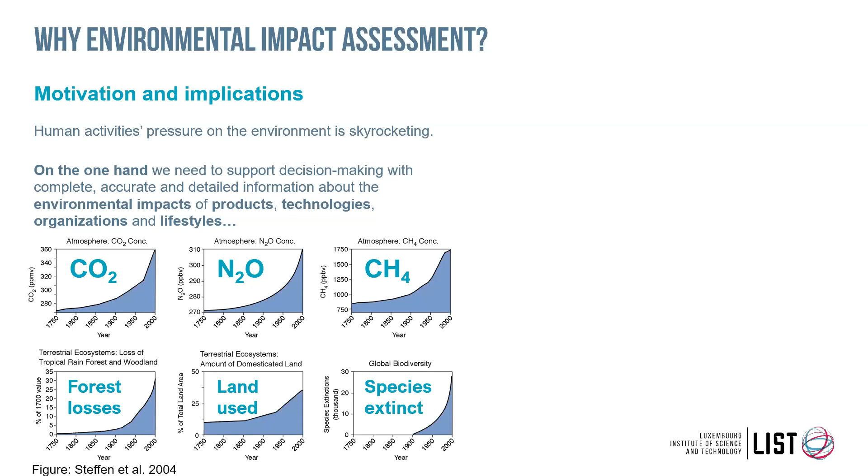So on the one hand, we need to produce and to support decision making with complete, accurate information about the environmental impacts of what we use. What we use can be anything from products, technologies, organizations, even lifestyles. If you know about individual carbon footprint, then the understanding behind it is life cycle thinking, and that's an assessment of your lifestyle. And on the other hand, we also need to ensure a safe, affordable, and fulfilling future, right?

We could obviously reduce environmental impacts if everyone was living in 10 square meters and eating only soybeans or bread and water. But that's not really what we want. So we want to find this balance between, on the one hand, limiting environmental impacts and not crossing the so-called planetary boundaries, and on the other hand, finding a satisfying life for most people. And for that, we have to use energy, a certain amount of energy.

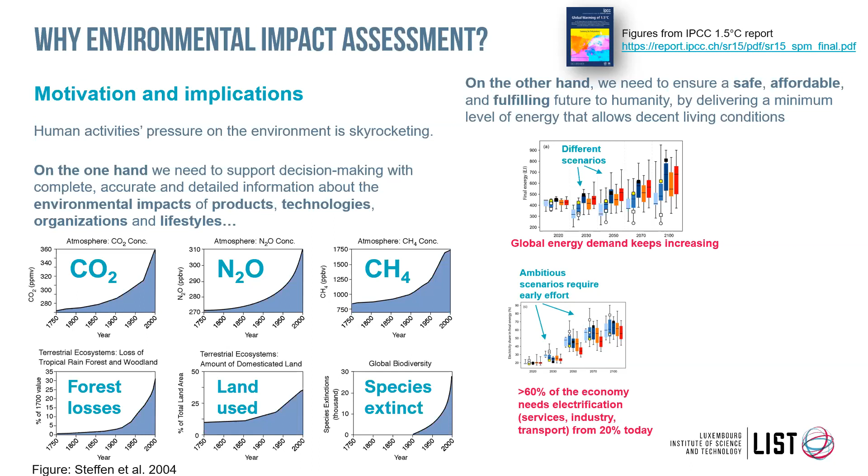We know that to decarbonize our economy, one of the main solutions is to electrify it. And the most ambitious scenarios in the IPCC assume that by 2100, I think, yes, 60% of the economy will be electrified from about 20% today. So that's a huge leap to pretty much an electrify-everything economy. In which case, we also have to decrease the carbon content of electricity.

So on the one hand, we need more electricity. The overall energy demand will keep increasing because more people need to increase their energy demand than people that need to reduce it. And that energy will mostly be electricity, and that electricity will mostly be low carbon. So that's a few challenges we need to address. At the same time, carbon is not everything, right?

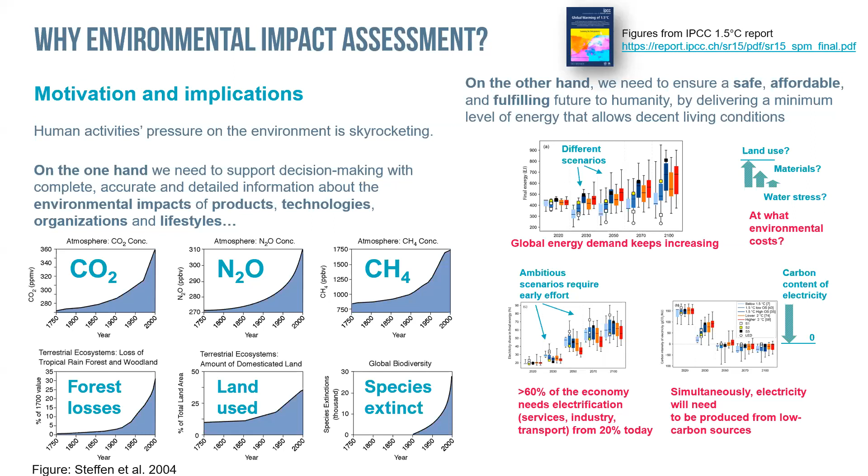We need to make sure that we don't increase other environmental impacts, which I call here environmental costs, but it's not monetary cost. Of course, it could lead to monetary costs, but first, what is the increase in land use? What could be the increase or decrease or other kinds of issues related to materials, and what could be other issues in terms of water stress, toxicity, particulate matter emissions, air quality, etc. So how do we assess our options? You may have seen in the press, usually, that kind of announcement.

So we need this life cycle approach. Let's take the example of electric cars. These cars have almost no emissions during the use phase, maybe a little bit of particles, but that's not so much. But most of the emissions will actually happen upstream of the system, either because you need to make a car or manufacture a battery, or because you need to produce electricity. And all impacts don't happen under your eyes as they do with a diesel car, but you still need to account for that if you do a life cycle assessment.

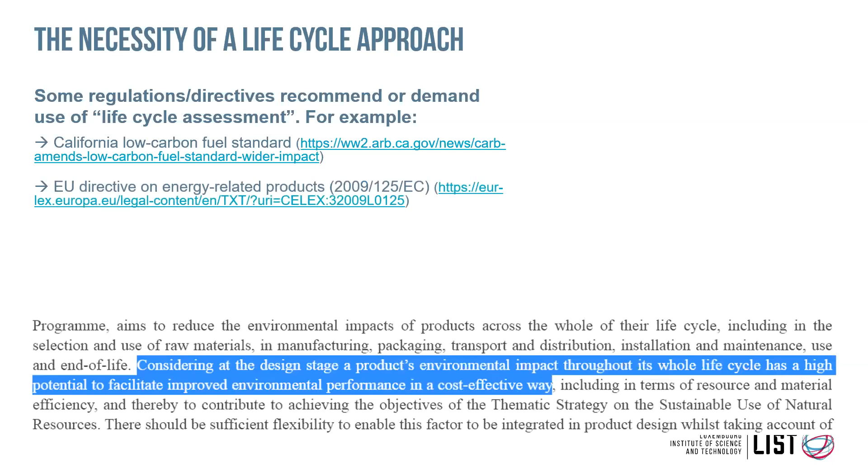Fortunately, at least in Europe, there are regulations and directives that recommend life cycle assessment. Even in the US, the California Low Carbon Fuel Standard recommends that cars' performance be assessed with life cycle assessment. The EU Directive on Energy-Related Products, for example, is using it. The Waste Framework Directive is using it. And perhaps most famously lately, the EU Taxonomy is using a life cycle approach to determine which investments could be deemed green and which not for the energy transition in Europe.

So now let's dive a bit deeper into the definition of what life cycle assessment is. First, it's a method and a tool for attributing environmental impacts to products and services. We have to consider the impacts over the life cycle of the product, not only the use phase. The product has a whole supply chain upstream, and we also need to take into account the impacts of discarding and treating the waste for this product. So we call it holistic, because we take into account everything.

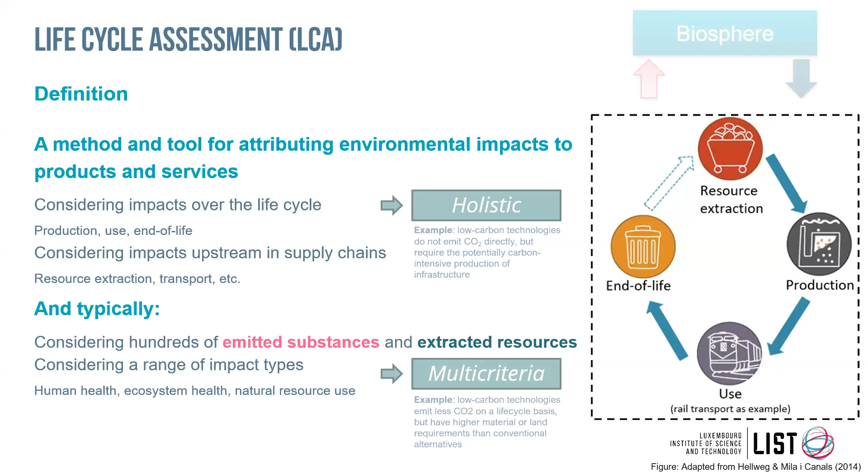And at the same time, we also have to consider hundreds of emitted substances and extracted resources. That's a bit of the difficulty in life cycle assessment, because it typically covers hundreds, if not thousands, of substances, from greenhouse gases, which are about 100 in the databases we use, to toxic compounds, which could be thousands, to land or water indicators as well. So that's a lot of criteria we want to assess and take into our modeling. So it is a multi-criteria method as well. These are the two main important points.

Holistic is important because you don't want to forget that you will emit CO2 somewhere, maybe in a blind spot of the system that you haven't considered. And multi-criteria because you don't want to find out later that you would actually have higher impacts that are not CO2; for example, you could have higher material or land requirements than conventional alternatives. So it's really important to identify co-benefits and trade-offs of decarbonization.

A quick example with wind power. Typically, you will start by accounting the amount of raw materials you need to extract together with the energy inputs, the infrastructure and the land use for the extraction of these raw materials. Of course, it depends a lot on the assumptions you make in terms of recycled content, but there's always a little bit of virgin material in most of the products you assess. Then you have to produce the different parts for a wind turbine. That takes into account the transformation of iron ore into steel, but also all the copper that goes with it. Again, it depends on the assumptions on recycled content.

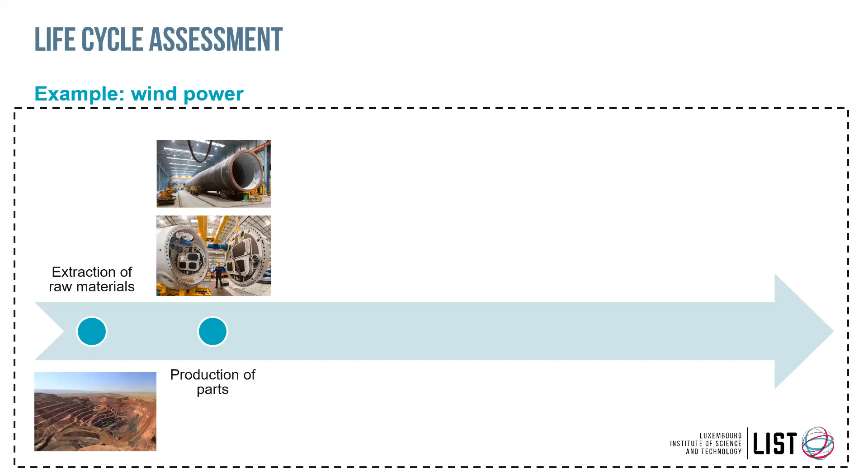There's a lot of transportation between all the stages. And at the end, you will have, for example, the construction. For offshore wind, it's quite important to take into account the back and forth of the different ships, which actually appears a little bit in the life cycle environmental profile. Operation and maintenance of this equipment is, of course, taken into account. For renewables, it's not that much. It's probably changing one or two parts once in a while, and all the maintenance trips that operators have to do. And end-of-life management, which will also take into account some sort of treatment.

Of course, we try not to double count both the use of recycled content at the beginning and the recycling at the end. There are different approaches to do this. Either we take one and not the other, or the other and not the one. So there are different approaches to LCA, but this is not the topic for today.

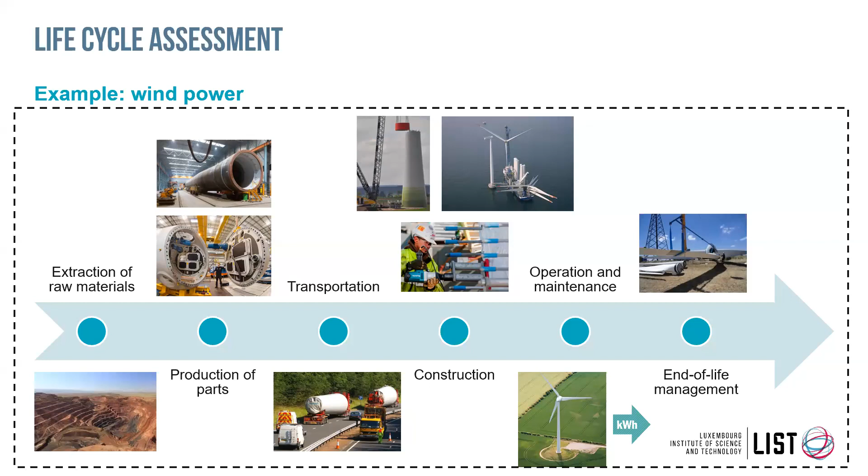And of course, the exchanges with the biosphere. Along this process, we take stock of all the emissions, literally thousands of emissions. We don't do that manually. We have databases to do it, but in the end, it happens to be about 1,000, 2,000, maybe 3,000 substances that we translate into indicators. CO2 equivalent is not a substance. It's an indicator for global warming potential, which translates the greenhouse effect in terms of radiative forcing, in terms of global warming in general. And you could also count the other way around, all the resources you take from the biosphere.

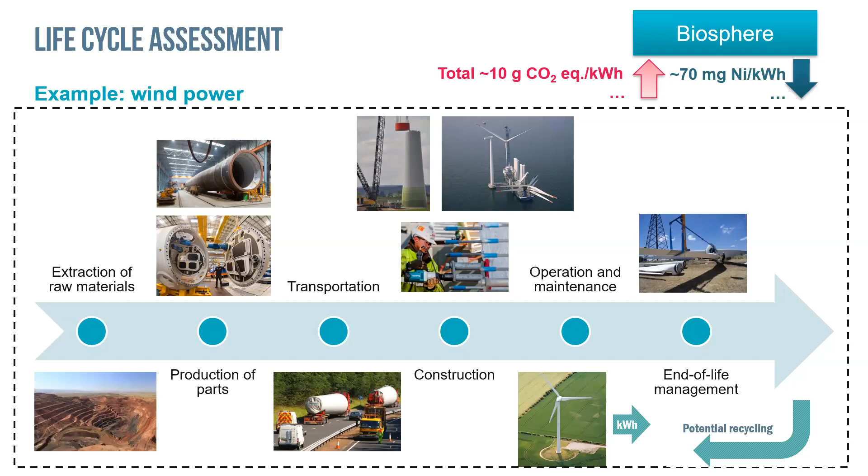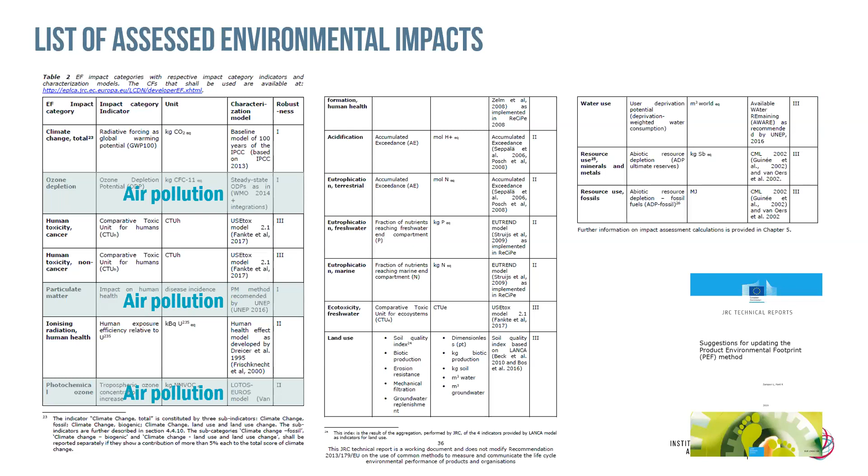So air pollution, toxicity, radiation, eutrophication, and resources. These are the main ones recommended right now. Of course, there's other methods that you could use to assess technologies and products, but these are the main ones. So the ones with the one are the ones considered the most robust, of course, because CO2, for example, are greenhouse gases. We know how they work. We know the effect of it.

It's a global problem. So if I emit 1 kilogram of CO2 where I am, or if we emit 1 kilogram of CO2 where you are, it's going to have the same effect, which is not true for all of those, which is not true for particulate matter, for example. Because if you emit particulate matter in a place when there's no one, it will have a much lower effect than if you do it in the center of a city.

Okay, so the results we will show now are actually an excerpt from this report, Lifecycle Assessment of Electricity Generation Options, that we started almost 2 years ago now, and that was released earlier this year. It's part of a larger package called the UNECE Carbon Neutrality Toolkit, where you could also find some briefs on hydrogen, nuclear power, CCS, and other topics like that.

So what did we find in this report? First I should also say it's an update of an earlier report from the UN Environmental Program, where we were missing a few technologies. For example, nuclear was not covered in this one, so we collected data and we actually did lifecycle assessment for this one, and we updated some numbers for the other technologies.

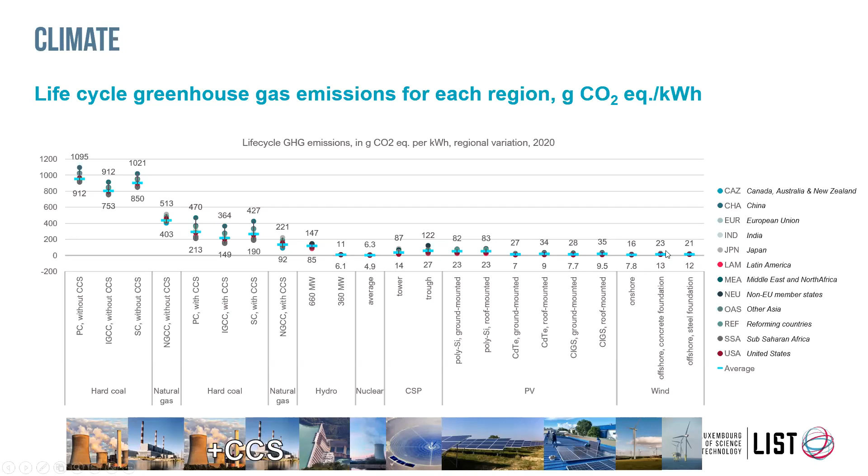Offshore wind turbines can reach load factors of about 40%. The best, I think, are doing 50%. And onshore is probably between 25 and 30%. So anyway, the good news is that all renewables are low carbon. And fossil fuels with CCS are barely there with our assumptions. The variations occur mostly in the background for the fossils and mostly in the foreground, so that will be load factors depending on the sun and wind, for the renewables.

In terms of land use, that was an interesting one, where we saw that, for example, fossil fuels, especially coal, still had some land use, as most of the mines worldwide are still open pit. Of course, it's a mix between open pit and underground, so depending on the region, you might have something that's higher or lower, depending on how you source your coal. Natural gas doesn't really induce any land use because most of it is obviously underground, so we don't really account for it in terms of land use.

It's higher for carbon capture and storage because of something we call the energy penalty. It's the fact that you will actually need more feedstock to run the capture equipment and all the subsequent sequestration, transportation behind it. So you need about 15% more energy to run the whole process, which means that for anything else than CO2, you will have a 15% increase in terms of impact.

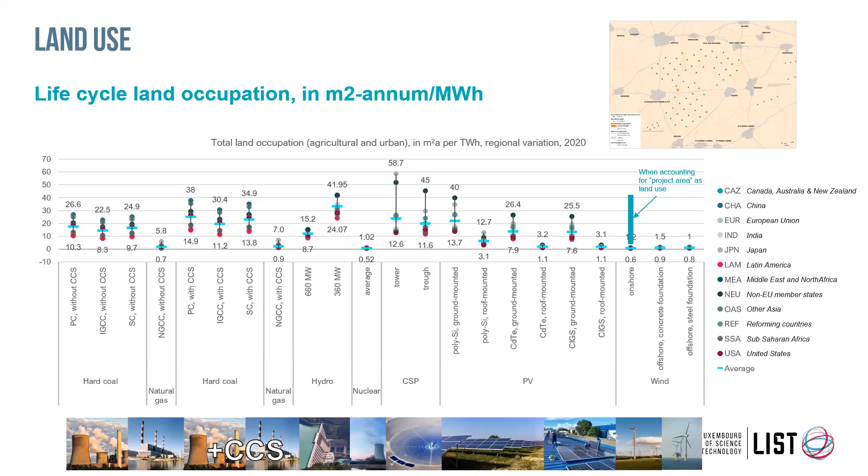Actually, it's been quite well detailed in this article by Our World in Data, with whom we collaborated. You may know this website, but it's quite well done there. There's a full narrative why we found these results, and then they make this comparison at the bottom. I don't know if it's really clear on the screen, but for onshore wind, for example, it could be anywhere between 8 square meters per megawatt hour and 100 square meters, depending what you take in terms of land use.

So first it's what you take into account, but also there's some potential combination with other uses. Roof-mounted PV is actually combined with the use of a building.

Ground-mounted can be combined with agriculture for agrivoltaics, and it's not uncommon to find crops between wind towers, at least for onshore wind turbines. So it really depends what you count as land use.

To finish on that, the French TSO RTE, the operator of the French grid, issued a report last year that goes even deeper into the distinction between shared use, sealed area, and artificialized area. Depending on what you take into account, land use can be very low or very high, so it really depends what you want at the end. I think this is a good case that illustrates LCA is quite complex and requires good communication to interpret results properly.

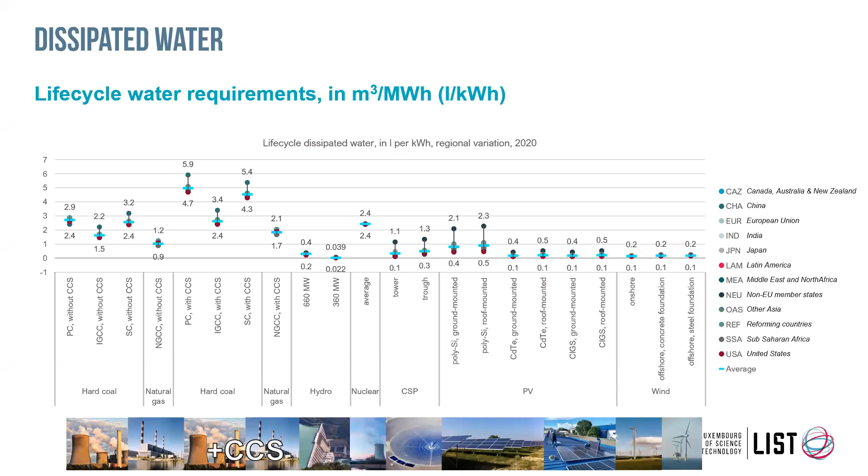Depending what we assume for the upstream - I think for silicon you need a bit of water, but also for maintenance, cleaning panels and things like that - that's taken into account here, but overall it's quite low. Hydro is low, surprisingly, but that's because the water returned to the environment isn't assessed here - only water taken out of the environment, either evaporated or used in the product.

Now we can get to materials. For materials, I have to give a caveat that this is a material footprint, not the amount of material in your bill of materials for the infrastructure. If you multiply these numbers by the megawatt hours produced over the lifetime of the equipment, you'll find something much higher than the actual weight of the equipment. That's because of the LCA methodology, which requires inputs of material that don't necessarily end up in a finished product.

We took the same list of materials as given in a publication by the IEA from last year, just to have a point of comparison. Again, something usual by now: medium for fossils, a bit higher for fossils with CCS. For hydro it can vary quite a lot, and I didn't include concrete here, but if I did, it would be much, much higher. Nuclear stays quite low, again because of the high density of uranium and the fact that a nuclear power plant can produce a lot of power.

We took 60 years as an average for the lifetime. I know this was criticized since most nuclear power plants right now haven't reached 60 years, but the ones we're building are planned for 60 years. Of course you can change that, and there's maybe a 10% variation on that number if you change the lifetime.

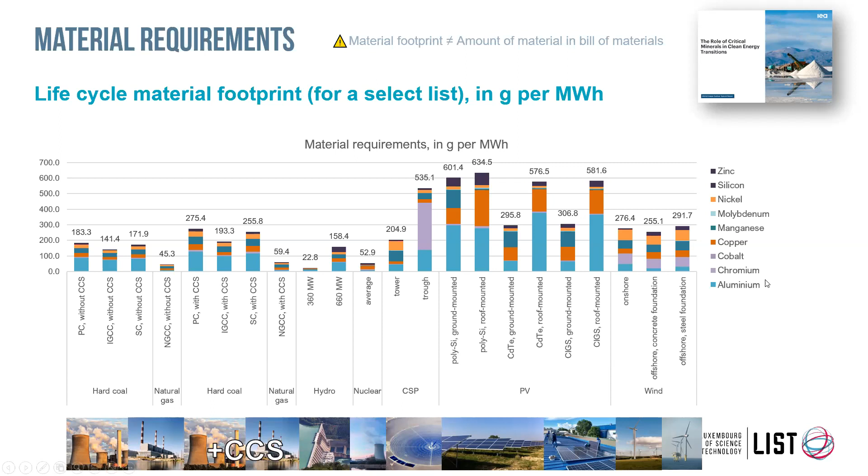So if we look at these materials, as I said we would compare - this is what the IEA gives us for the same list of materials: copper, lithium, nickel, manganese, etc. They do it for a car on top, and for power generation on the bottom. I didn't do a direct comparison because they calculate it by installed capacity, so you have to translate that using the number of hours a plant will run over its lifetime.

Here they find that offshore wind and onshore wind actually have a higher material footprint or material requirements than solar PV, because they count, I think this is still copper. They found that offshore wind has more copper. Probably there's some connection that we left out in the modeling, or we took into account that it was part of the grid. So again, another limit of LCA is that you need to know exactly what the scope is.

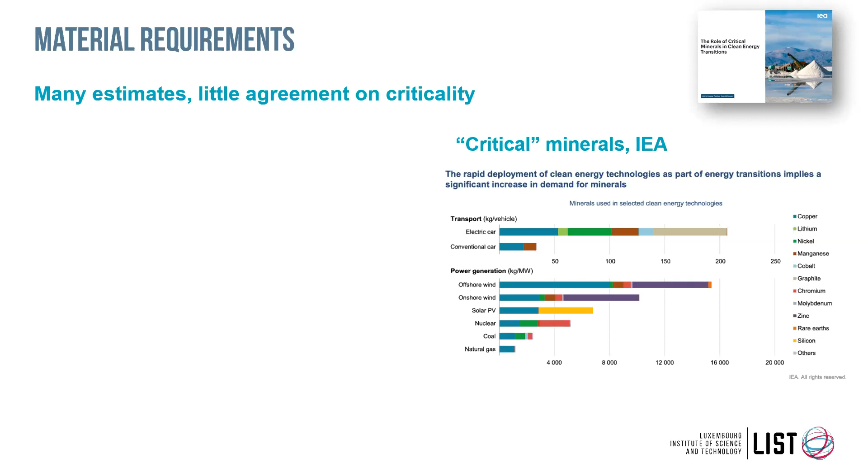Yeah, and the other one, I think it's zinc here. So these are what we would call critical materials for the energy transition. But of course, you have other materials such as typically iron, concrete, aluminum, copper, which is more... well, actually you have copper and then... no, you have only copper, sorry. But here you have mostly what we would call bulk materials, which are also of concern if you want to upscale your renewable grid. So it's not really an issue, but you have to be careful and remember what the orders of magnitude are here.

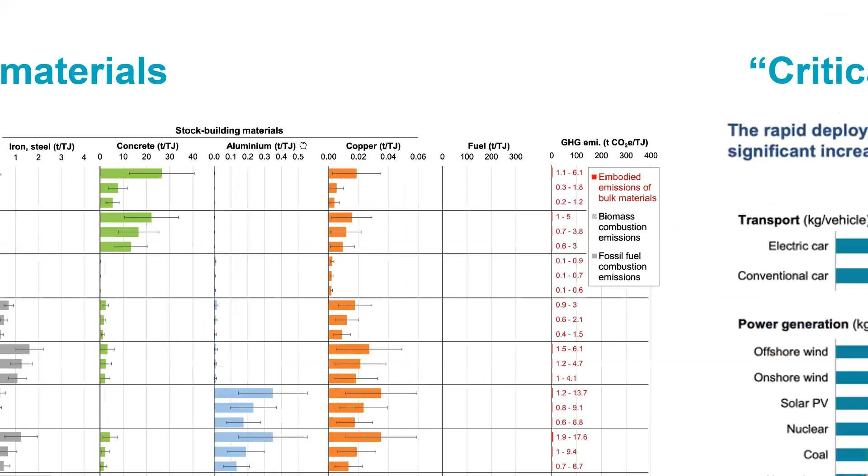So right now, this is just a comparison between different technologies, again from another publication. You have hydropower on top. I think you can zoom, perfect. Hydropower on top here, so hydro will use a lot of concrete. Then you have some geothermal. Wind would use a bit of concrete as well for the base of the towers. And then solar at the bottom.

But then comes aluminium. Again, that's something we found in our study. So this is consistent. PV is the main consumer of aluminium, and then all technologies consume copper for the connections. PV first, and then wind offshore. Sorry, first, and then onshore.

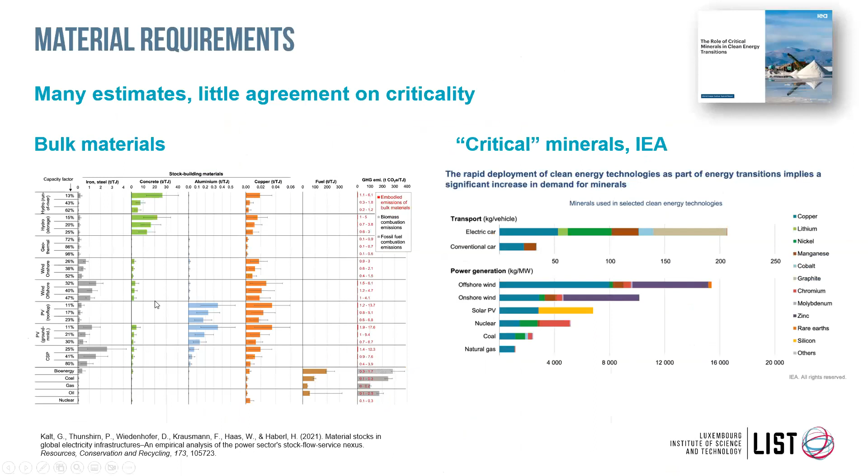So this, I think, was quite a nice publication. There's another nice graph in there, which maybe we don't spend too much time on, but it shows that if we decarbonize, we might actually shift pressure from fossil fuels to materials. So this is the fuel intensity per country of the electric grid, and this is the material stock intensity of all these countries, also per unit of electricity. And you have obviously all the hydro countries here, because concrete is by far the main material we use in the electricity system. And then somewhere in between, you have mixes of renewables.

You have France here with nuclear, and here you have most fossil countries. So it's really a switch we see from fuel intensity to material stock intensity. Again, it's not representative of the actual stress or criticality because, okay, we need a lot of concrete, but is that a problem? I don't know.

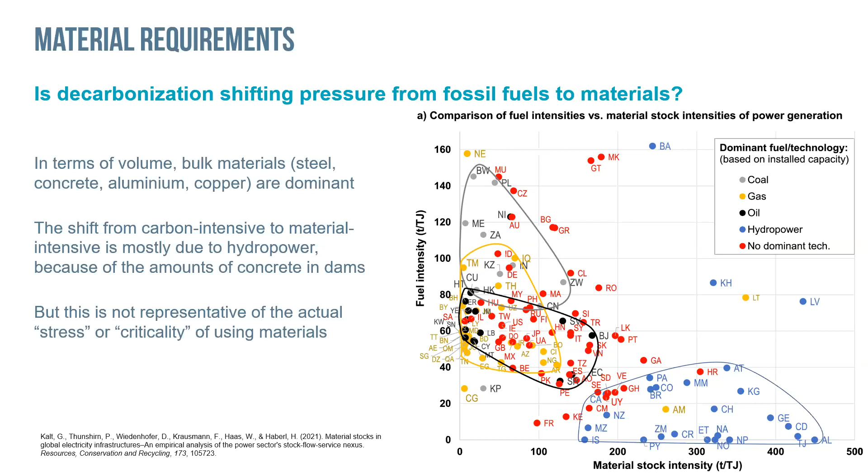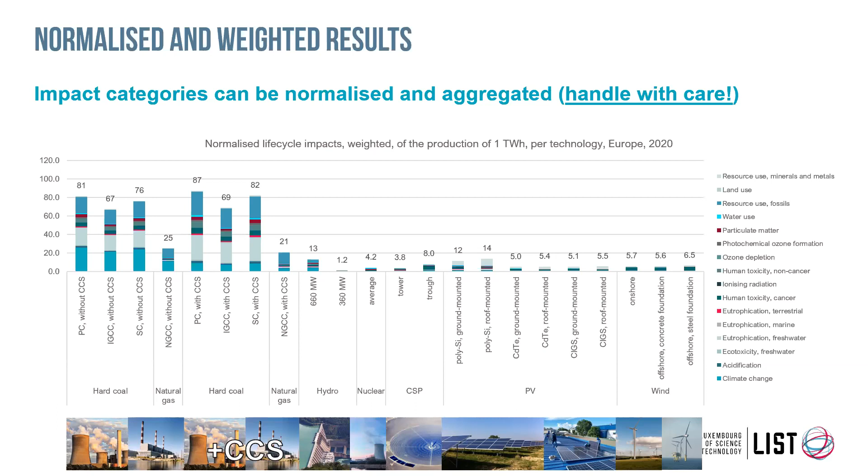Something I wanted to show, but that you shouldn't really take into account, and I will explain why, is that we can give a single score in LCA. There's not an absolute consensus on how we do this, but there's a way to normalize and weight the different impact categories that I showed at the beginning. We give them a score, and for each technology we just aggregate everything. And of course, there's a bit of subjectivity in there. So that's why we don't really like to show it, but also because it's in the report, I wanted to mention that we have single score indications, but of course it doesn't really tell you whether it's an issue to replace CO2 emissions by particulate matter emissions - this is subject to a lot of interpretation.

We can go quickly through where impacts come from now per technology, but at the end it's going to be too much, I think it's quite obvious. For PV panels, it's mostly silicon production, in blue here, that dominates most of the environmental impacts. There's a bit of construction here, carcinogenic effects because of the fuel used during the construction phase, and the inverters, and finally cell manufacturing will require most minerals and metals. But otherwise, everything is in infrastructure.

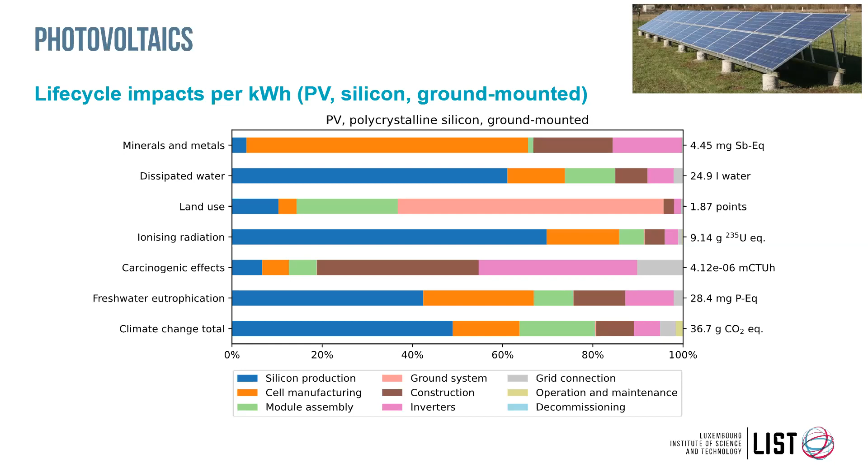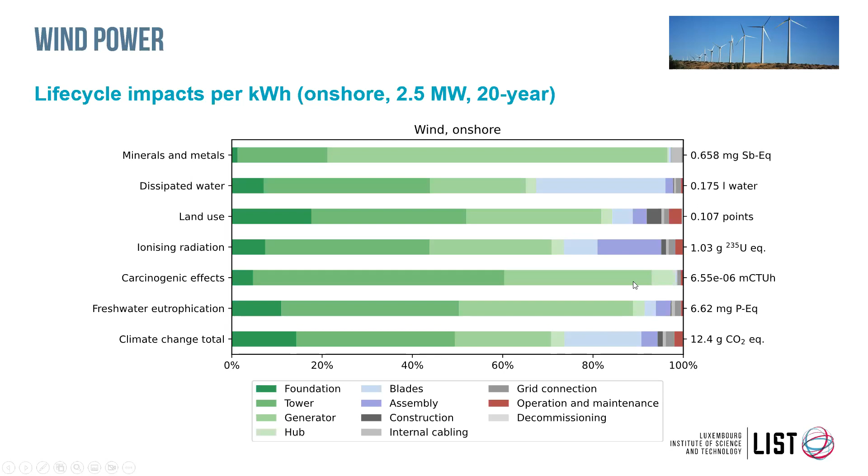For wind power, we have about the same, with here foundation, tower, generator. So most of it is just the infrastructure of the equipment, not much else. And even blades here in blue are quite small in terms of contribution.

And for nuclear power, it's mostly the upstream chain of the uranium, from mining to enrichment to fuel fabrication, construction of the power plants, and a little bit of spent fuel management, with the storage, waste storage, and a bit of treatment as well.

So I think one big conclusion is that all electricity sources have an impact. There's no free lunch. The question is just how much.

In terms of greenhouse gas emissions, they're really low for all renewables and for nuclear power. For renewables, most emissions are embodied in the infrastructure, so it's also beneficial in the sense that the cleaner the economy, the cleaner the power. If you manufacture photovoltaic panels in an economy that runs itself on renewables, your panels will have a lower impact than if they were fabricated with coal power. So there's this kind of virtuous cycle that starts to appear in decarbonizing economies. That's quite nice to observe.

We also see nuclear power has an environmental profile that shows low impact on all indicators. That's mostly because uranium is very dense. Of course, it doesn't take into account any other indicator that could be linked to nuclear power, but I don't think we have to talk about it here.

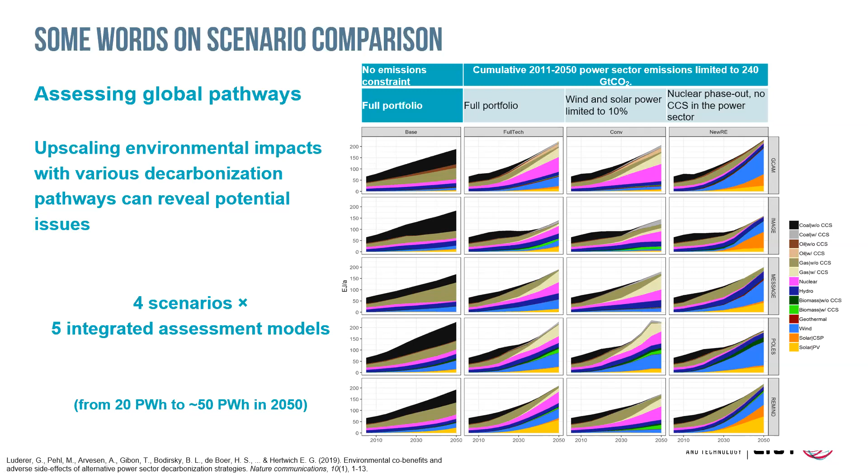But anyway, we applied our life cycle assessment factors to it. So what happens? For all our human health impacts, this business-as-usual scenario obviously has the highest impact, because that's where you keep going with fossil plants. This is everything but CO2, by the way — so you still have particulate matter and human toxicity impacts. Here you have a scenario with all technologies available, one with only conventional technologies available, and one with only new renewables. This is the one with the lowest health impacts.

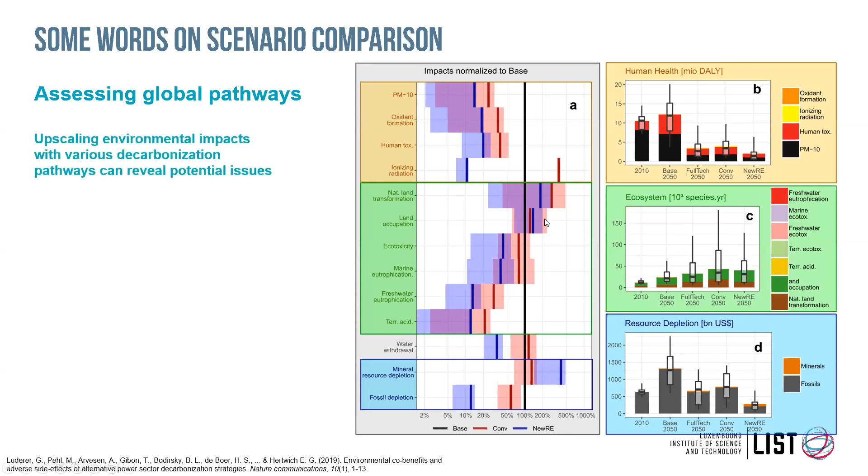In terms of ecosystems, it's the same — land occupation and natural land transformation come mostly from biomass. And then minerals and fossils in terms of resources. You can see that compared to our business-as-usual scenario, in black here, most of the impacts are actually decreasing with the different alternative scenarios, except natural land transformation, land occupation, and mineral resource depletion. So that really shows where the next potential hotspots could be with decarbonization.

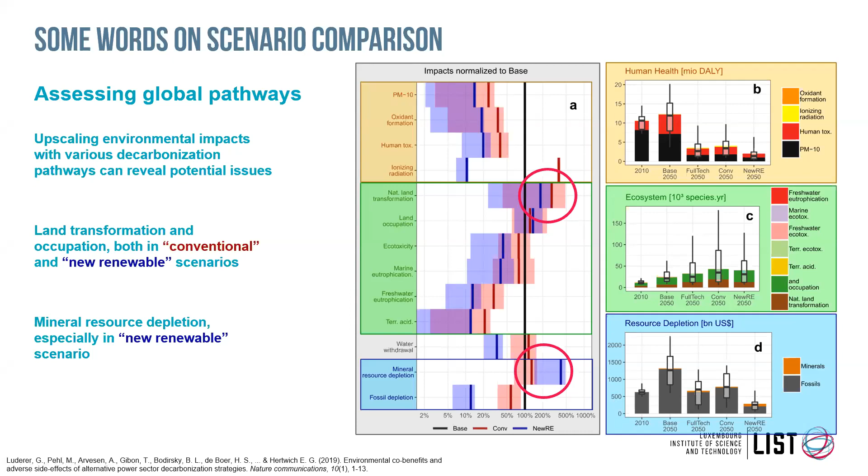Just to invite you to go look somewhere else — I already mentioned that the report numbers were used in a nice article on Our World in Data. As of last week, the UNECE emission factors are also used in the Electricity Maps application, which you may know if you were at the last Electrification Academy lecture — an app where you can see real-time monitoring of electricity production and consumption. It's nice to see the product of one's work reused in a real-life application that has probably a better direct use than a report sitting somewhere.

So maybe I'll just stop here. That's half an hour, and then we can switch to the questions.